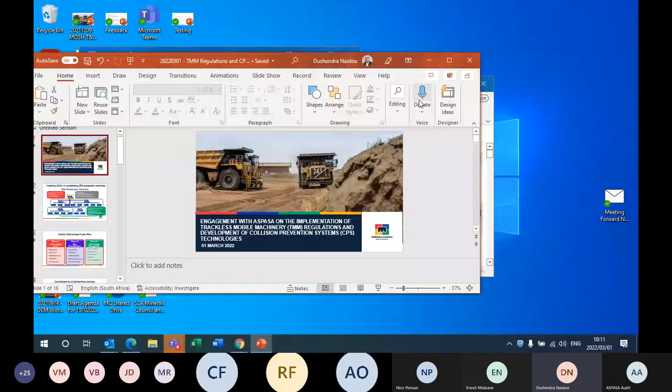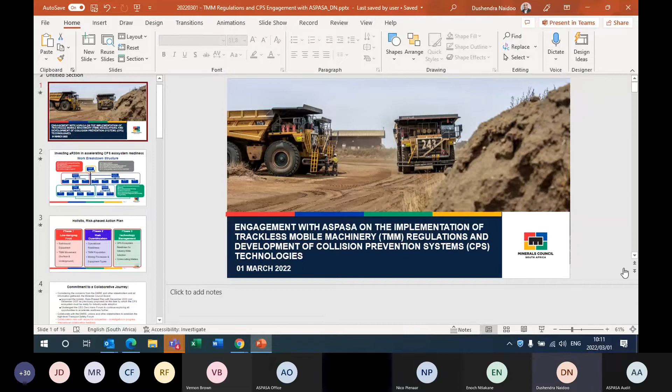Just a second, just getting my... please let me know when you can see the presentation in slide format. It's there, but it's small, can you maybe make it bigger? Okay, it's there, but it's compressed, I don't know how you make it bigger. Let me try again. Annika might be able to just... I don't know how it works. Okay, one second. I don't know if that's the biggest... might have been the biggest, but I think he had it in presentation mode, Nico, which seemed fine. Oh okay, sorry, let me just share again. There we go, there we are, okay.

We want to talk about the implementation of the trackless mobile machinery regulations and the development of collision prevention systems, on a technology level as well as other levels, which we've been quite busy with for the past few years. These regulations really deal with the auto slowdown and stop items, which was suspended, and the DMRE is looking at promulgating at quite an early stage.

So just to give you some information and to recap some of the key workings or the key skeleton framework of the project, we've broken it down into different work packages. There's been quite a substantial investment of 30 million Rand in accelerating the collision prevention system ecosystem readiness, as we call it. We call it a collision prevention system as per the Mine Health and Safety Act. You might be familiar with old terminology such as PDS and CAS, but now we're using this terminology, CPS, which encompasses the complete collision prevention system.

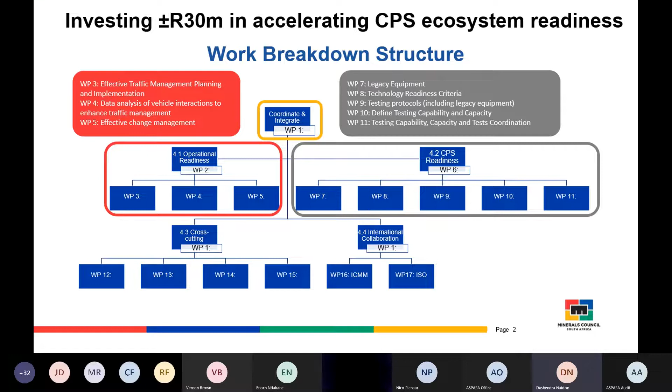The next key thing is the technology. We've been looking at legacy equipment, technology readiness criteria, and testing protocols that have currently been developed to a stage of maturity where it has actually been released to the industry. We've defined testing capability and capacity, and this also encompasses some of the test coordination work we're busy with at this point. There's numerous streams here, and we've also got a consultant on board, namely SECD, who've helped us develop technology requirements.

Then there's the cross-cutting aspects, which relate to the quantified unintended consequences. This would contain studies on how operators are affected by sudden braking and auto stopping and that sort of thing. Some guidance for CAS technology management implications, the Section 21 guidance, and then formal vendor alignment on legal liability that we're covering—that's a major stream of the project.

We've also been aligning ourselves and working with international entities, namely IMMERSE, the ICMM, and ISO. This is to keep track of what's being done overseas, what's being done in the vehicle interaction programs overseas.

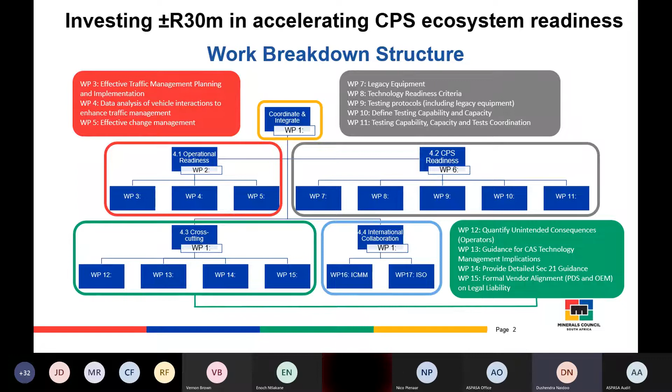Due to the regulatory nature of our environment, we are, of course, quite ahead in the project, but we are keeping in line with what they are doing, and it's really a combined effort towards increasing safety for the people in our industry.

Moving on to the holistic risk phase action plan instituted for this project. There are 3 phases: the low-hanging fruit phase, where we focused on rail-bound equipment. In parallel, we're looking at root cause analytics for some of the incidents that have occurred and the common causes that result in incidents, including TMM movement for surface and underground.

For phase 2, we did a risk quantification, and as I mentioned, the operational readiness. We got an idea of the TMM population and stipulated mining processes and equipment types. A lot of work has already been done in these spaces, together with phase 3 on technology management, which dealt with ecosystem readiness for industry-wide adoption and some of the cross-cutting matters mentioned in the previous slide.

Taking you to our commitment to a collaborative journey. Due to the concerns from the DMRE and other stakeholders, and all the information gathered, the Minerals Council Board has approved the Holistic Risk Phase Plan, and we're looking at December 2023 as a target date for getting all the readiness aspects in line.

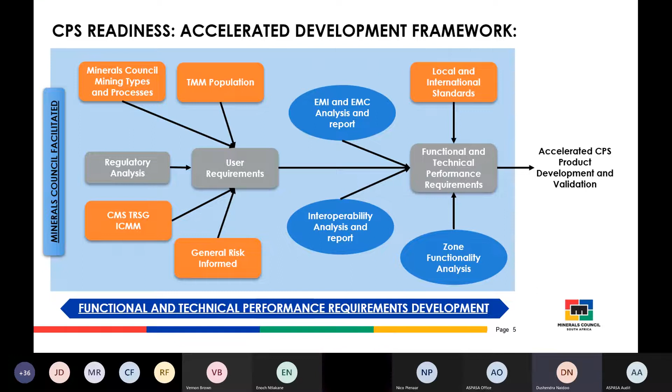So we are facilitating this process as the Minerals Council. I just want to take you to the next slide, which deals with our accelerated product development plan. The readiness criteria and integrated testing regime has been developed.

The specific technology readiness levels, and the key thing is collaboration between the trackless mobile machinery OEMs, the mines, the specialists, the CXD developers, and CPS product developers. In order for this to be successful and to meet the timeline before the regulations are lifted, we need this collaborative effort. The only way to do that is to get everyone on board with the testing requirements, the new requirements, and the key technical compliance aspects in order to roll out to all the mine sites.

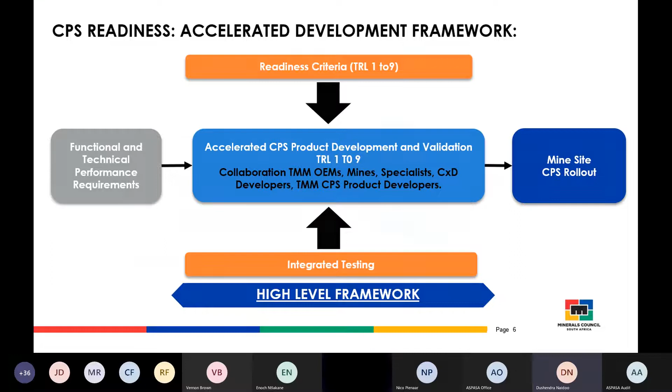I just want to go quickly over testing. Testing is a major drive for this year. We've started looking at all the aspects, but just to give you some context to what testing involves, there are numerous technology readiness levels, so TRL level 1 to 9.

1 to 3 is really on the actual collision avoidance device, so that's on the developer side that will have to be complied with. I've just noted all the key TRL levels here for testing. TRL 4 is the proving ground test, where you'll have a basic CXD and TMM. There's the ISO 21815 communication protocol that needs to be checked for communication between the CXD and the TMM, and of course the braking response and that sort of thing.

From there, there'll be a TRL 5 transition stage, and then you move to TRL 6 to look at integration of the actual device on the TMM and see how that performs. So there'll be numerous tests around the integration. And then the combined system also needs to be placed in a representative environment to ensure that things like line of sight and boundaries, the ground conditions and that sort of thing are catered for, and that's for the advanced CXD.

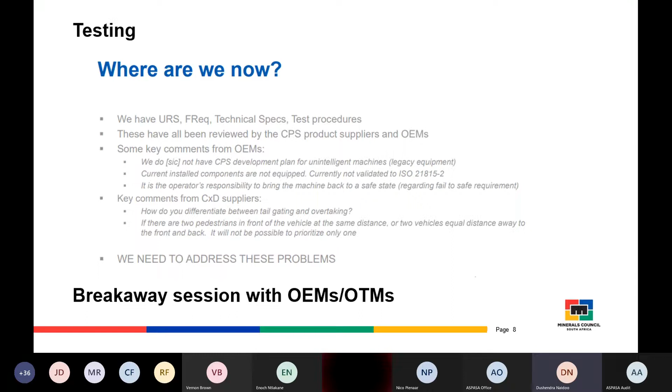Currently, in parallel with that work, we're also looking at accelerating the test plans. Some of the key initiatives have been to look at pilot test sites, and also looking at donations of test machines to initiate the test validation work. I want to use this opportunity to thank Nico for pointing us in the right direction for the pilot test sites.

I also want to personally thank, I'm not sure if they're on the call, Letitia van der Berg and Piet Ackerman, who welcomed us at Glen Douglas mine. We visited there, and everything was really good in terms of testing and site conditions, so that's a good viable option. I also want to thank Mr. Arthur Dindani from PPC Quarries for hosting us at that site, and Mr. Jürgens Visser from Maseve Mine. We visited surface and underground, so there are options there as well for doing tests.

And then Mr. Trevor McAdam from Drift Super Sand, who's also given us a few options around testing. Letitia from Glen Douglas also secured a donation of a test machine. Thank you very much for your support and proactively helping us through this effort.

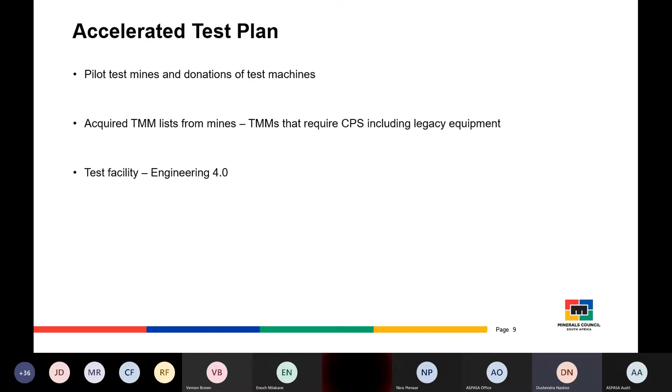Okay, so that's the testing aspect. There's a lot more to the testing facility and all of that, but I'm not going to go into that detail for this presentation. I'm moving on to the skills readiness aspect.

The IDM Business Academy has completed the study. The report was reviewed, and we're now firming up on conclusions and recommendations for ensuring that the South African mining industry is geared up for installation, repair, and maintenance of collision prevention systems. This information will be issued very soon to the industry.

So just going through some of the work done in this space on skills readiness. The IDM team have been involved with interviews, online questionnaires, and desktop research with a number of OTMs, OEMs, and mining houses. So they've acquired quite a large amount of data along the lines of installation, repair, and maintenance.

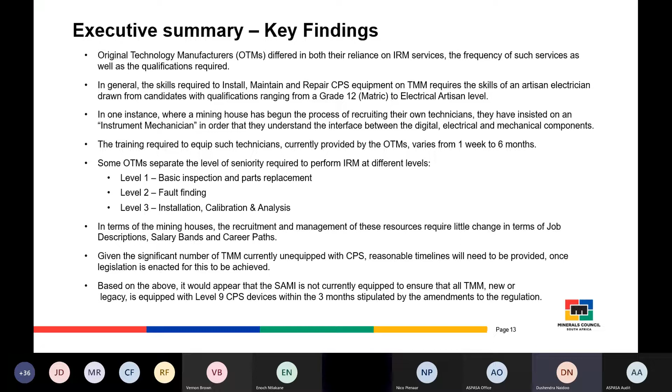It's because of the complexity of the collision prevention systems that the timeline for training varies. Different OEM entities and OTMs have different forms of training, and the timeline changes. So we'll have to streamline on the best way forward for that.

So these are some of the implications for transitioning strategies. In terms of the mining houses, recruitment and management of resources requires little change in terms of job. I think I've mentioned this to some extent.

The willingness of OTMs to transfer these skills is mixed, with many willing to cooperate, at least in part. And this, of course, leans on intellectual property issues and that sort of thing.

Most of the OTMs and the mining houses agree that training, and in some cases supervision, will need to be retained by the OTMs, predominantly due to concerns around legal liability and reputational damage that may ensue as a result of their training potentially being implemented in a manner that does not meet the required standards. So some obvious concerns around the standard of training, IP, and legal liability.

I'm just looking at this 3-month window. Okay, so that's something we of course are going to improve on.

The fulfillment of the IRM requirements and associated skills are likely to depend on a technology-based versus IRM-based business model. So they've looked at different types of models, in-source versus outsourced models for training, and we'll obviously recommend the best approach. Several important factors will need to be considered in the implementation of a skills transfer strategy by the mining houses, and these are outlined in the report.

All right, there we go. Good morning, colleagues. Just wanna share this with you quickly. I'm sorry for my voice, I've got a little bit of a flu, so my voice might die at any time. But I want to present what we've got in front of us here, which is the list of machines required to be donated as part of the integrated testing regime.

So far, we've had 4 machines that have been pledged. We've got 1 front-end loader and 1 grader pledged so far, and thanks to Afrimat for these donations. In terms of underground, we've had a pledge for 1 LHD, courtesy of Northam Booysendal, and a personnel transporter from Glencore Alloys. So far 4 machines have been pledged.

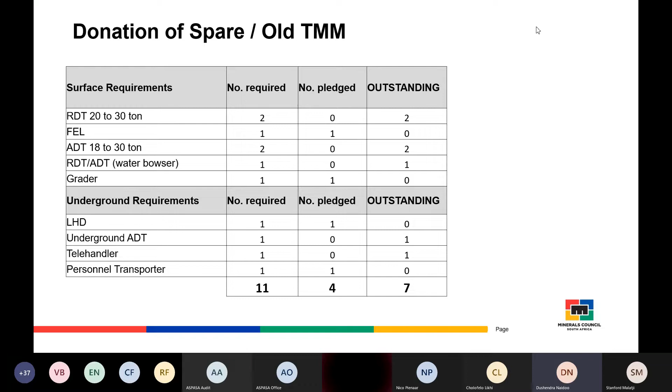I see there's a hand up. Sorry, Nico, just help me. ASPASA audit, I see on the line. I think that's Anthony. Anthony, you can go ahead.

Hi, Dushendra. It's just a quick question on this. When you ask for donations of, for example, an ADT, which is basically what most quarries use, will that require the machine going off-site, or will the testing be done on-site?

Thanks for that, Anthony. Anything else around testing or any of the other aspects that we can support with?